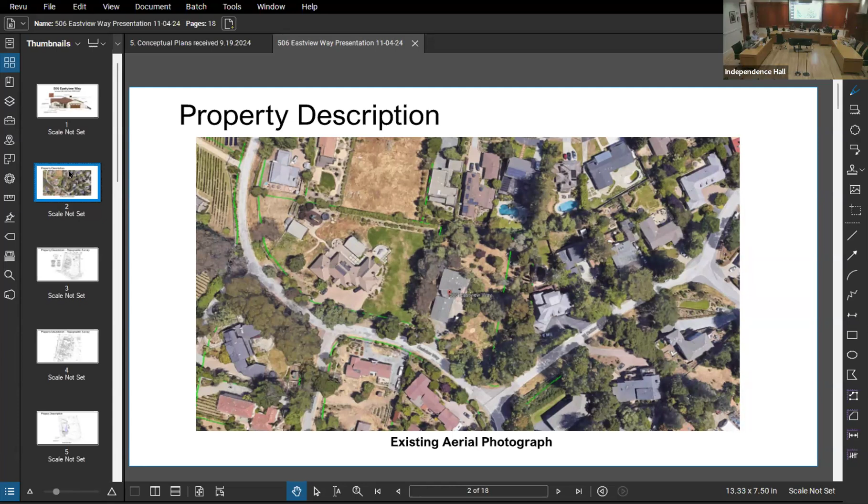To give you some background on the property description: the property size is approximately 1.15 acres over 2 parcels, both owned by the homeowner. It's about 50,000 square feet and is in the suburban residential SR zoning district. The residence borders the city of Redwood City on the right side, and the overall site gently slopes downward from an elevation of approximately 538 feet on the southern side to 508 feet on the northern side.

The site also has a number of oak, eucalyptus, and acacia trees scattered throughout the property. The property features existing concrete cinder block walls in the northeastern section of the site; the current and future proposed uses for these are not detailed and will be described during formal design review. The property also includes a 10-foot-wide existing drainage and sewer easement running parallel to the north property line, and a 50-foot-wide PG&E utility easement adjacent to the southern property line that runs along the Eastview Way roadway.

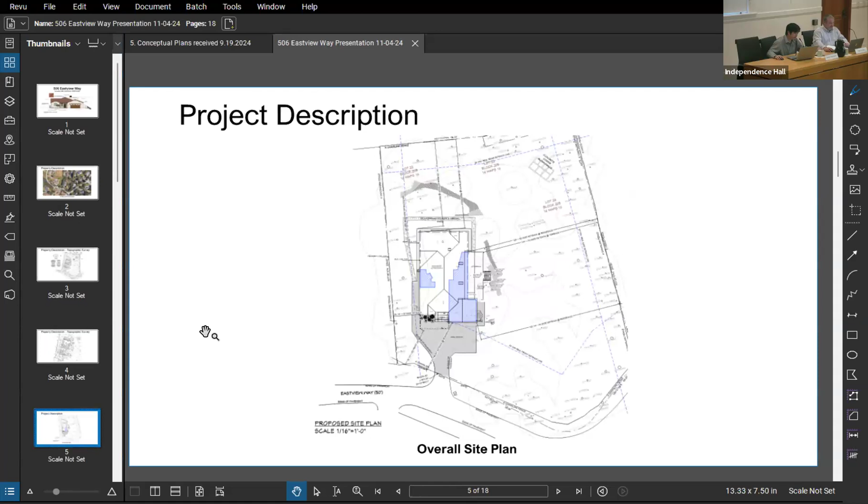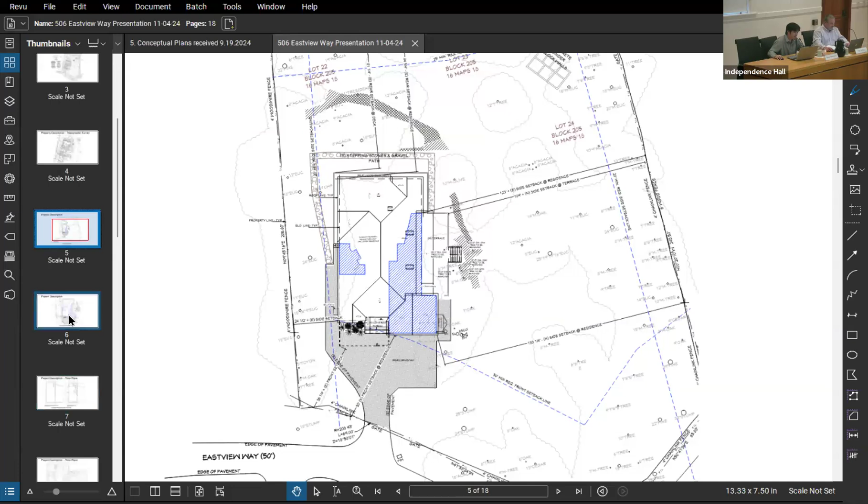This is the overall site plan enlarged to show the main residence, and what's outlined in blue indicates the portions to be added to the existing main residence.

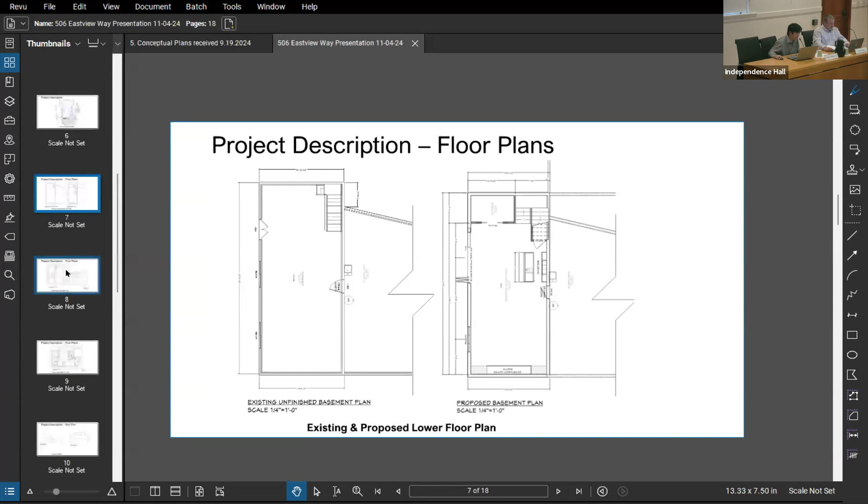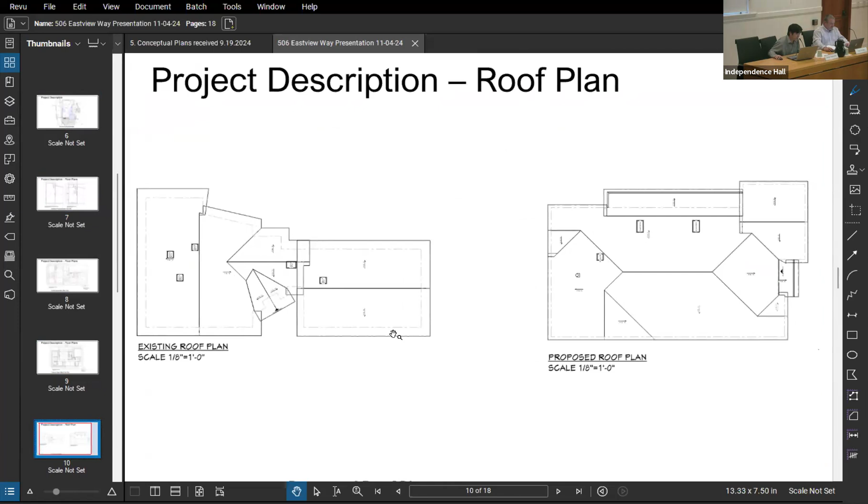You can see more of the extent of this extension with the existing roof plan, which has an irregular design with many cuts and corners. The proposed roof plan is more rectangular in design.

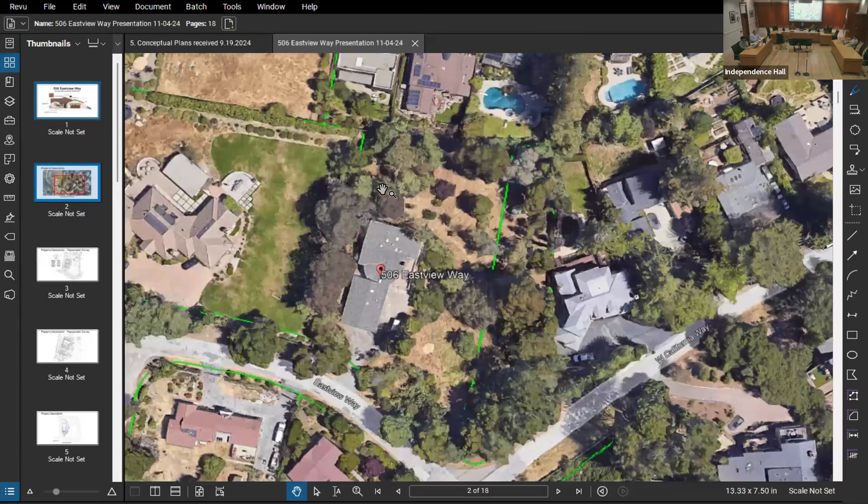Good afternoon. My name is Veronique Garcia, and I'm the applicant and designer of the project.

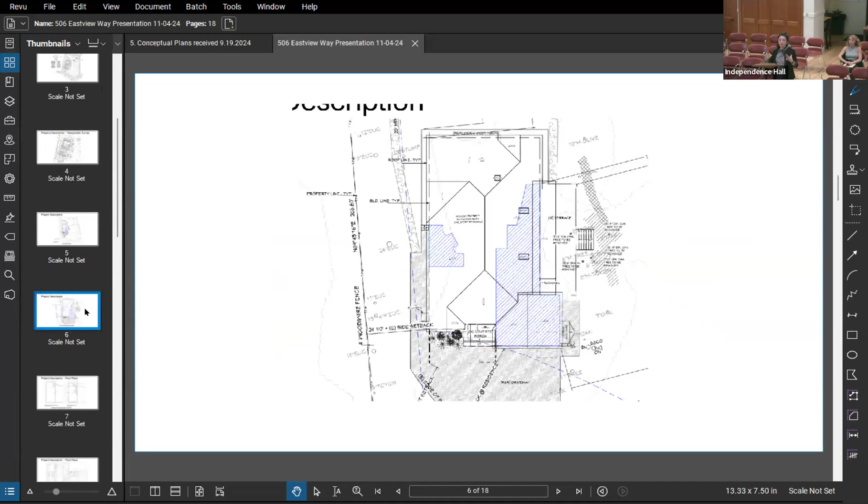To tell you a little more about how we arrived at the proposed design, one of the main goals of the owner was to convert the existing carport into a two-car garage. By doing that, we couldn't keep the existing setback of 36 feet. We had to change the setback to 50 feet, which forced us to relocate the garage, more of an extended project scope than we were anticipating. But in the meantime, it allowed us to add a front porch and have the main entrance as a feature when you come upon the property.

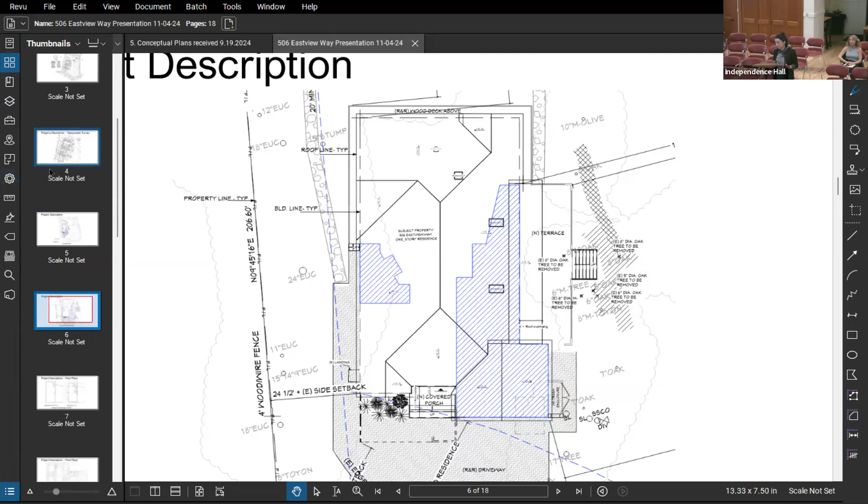Right now, the main entrance is on the left side, so when you arrive at the property, you arrive into the carport. By doing the relocation and addition, we really tried to minimize the impact on the existing terrain as well as the grading. I hope you like the design, and if you have any more questions for me or for the owner, Angela Pietro, she's present here as well.

Thank you. Does anyone on the board have questions?

I just have one question. It sounds like the neighbors were notified of the project, but did you do any neighborhood outreach? Did you talk to the neighbors, show them the plans, get their feedback?

I talked to a few of the neighbors and they were all in support of the project and said that they would write letters or show up. So I haven't heard any opposition so far.

I just have one question. Are all the fences on the property existing? No, the fence is new. The old fence was not secure and I had to keep my dog in, so I put in a new fence. They told me I did not need a permit for that, so I'm hoping that's okay.

Technically, a permit is required, but we can wrap that into this process. Okay. Anything else? You received bad information.

Actually, a question for you, Kiego. With regard to the 17-foot height restriction, I noticed that the top, the high point of the ridge, is currently measured at 17.7 feet.

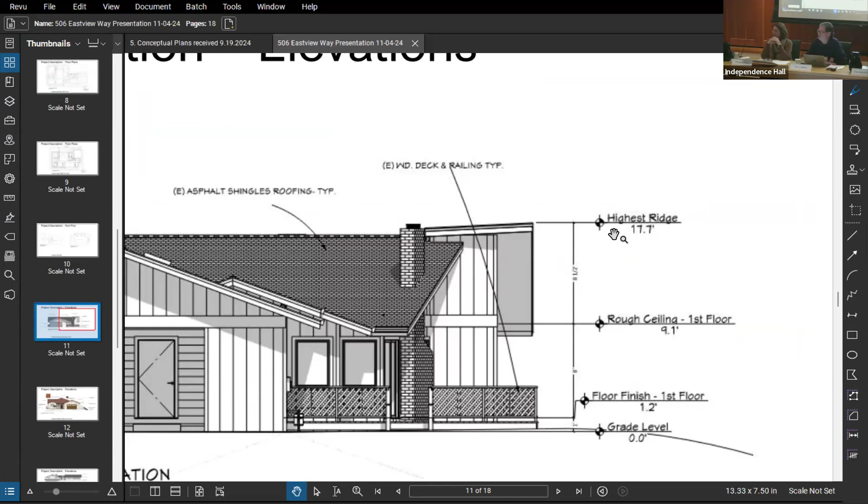That would just get noted informally and you would seek an adjustment on that? Because it's the main residence, they can have a taller building, but the only thing we would need to double check is if it affects the setback in any way. Usually if it's just that much taller, the way the roof line goes, it's probably going to be set back far enough to meet the height limit, but we can look at that closer. All right, thanks.

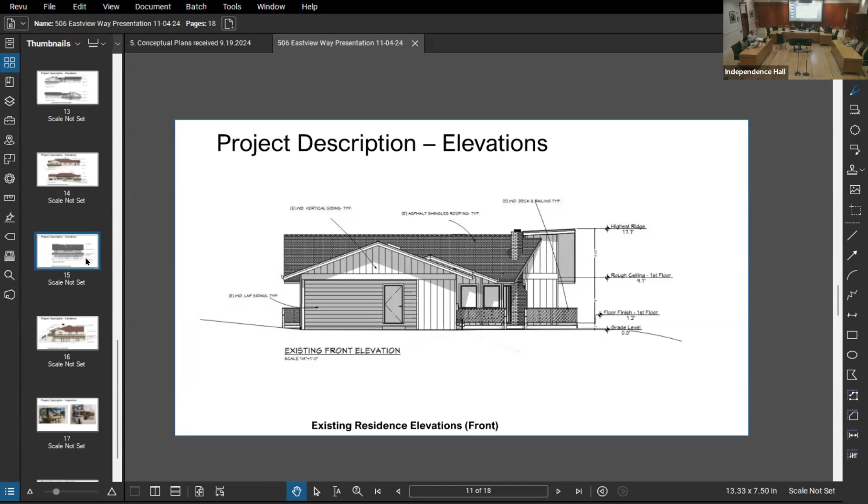Okay, good, no other questions from me. Any others? Oh, actually, no, I take that back. I want to make a comment on the stucco.

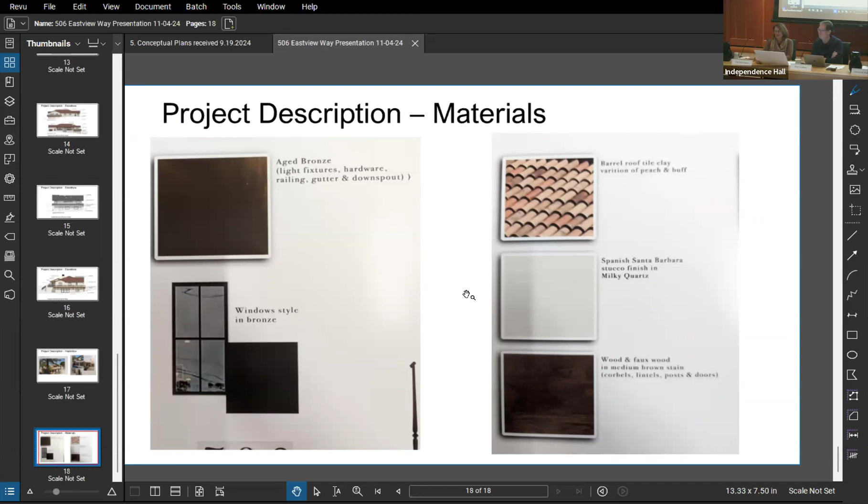We generally give guidance to avoid very bright white. We tend to look for something that's a little off-white. I don't know without a real sample of what milky quartz looks like exactly, so it's hard to gauge, but it would definitely be a soft Spanish cream tone. It won't be bright white. Just want to avoid a stark white stucco.

With regard to that, sorry, I wanted to add something. All the materials will also now meet the wildland urban interface requirements, meaning the stucco will be all fire rated, which is a big improvement since the house is currently all made of wood. I forgot to mention that, thank you.

No other comments from me on materials. Anyone else? No, I actually think I like the materials. Normally we go for wanting a more muted tone on the color of the house, but it's not on a scenic corridor or anything, so if it's not bright white, that's great.

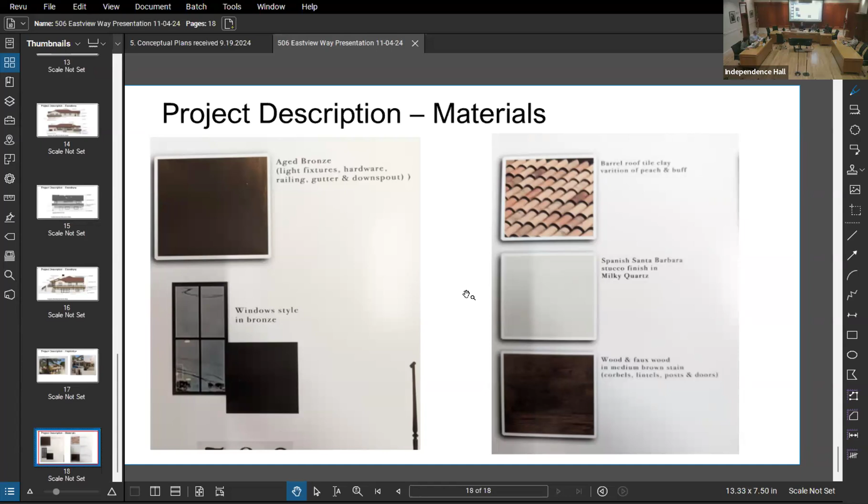The other thing is I like what you've done changing the entryway. I always like a nice curb appeal, and right now you really don't have curb appeal, so I think doing that is quite beneficial.

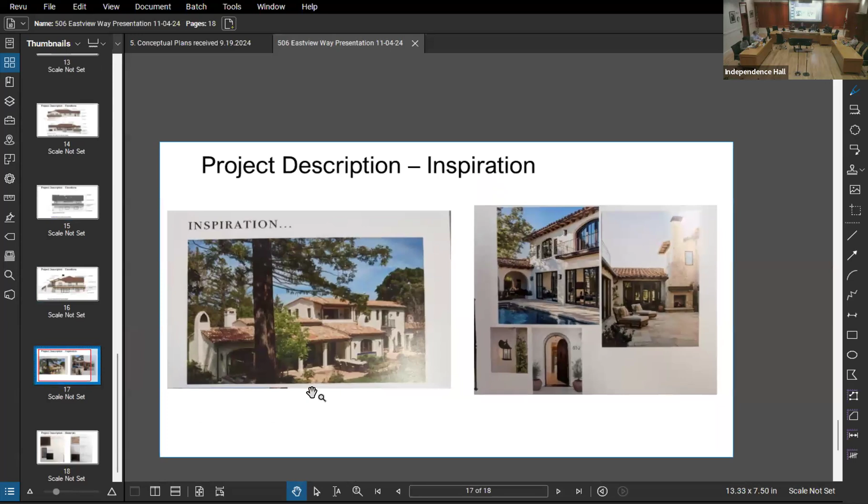I think the colors look true to the Spanish style you're trying to create here, and I think you've done a nice job putting together the organic finishes with the bronze and the barrel tile roof. I think it's really attractive. We haven't seen something Spanish style for a long time, and it's very nice.

Anything else? I guess the one question I had, have you thought about how solar might fit on the site in the future, considering the Spanish style tile roof, how we want to put it on the roof? I haven't recovered from my last solar project, but fair enough.

We'll consider it. There will be certain requirements to meet minimum standards for the building code, especially if you're doing a new roof. It's easier at that time with a tile roof, you can integrate it better into it as opposed to breaking up existing tile. So if that's the case, they would work that into their building construction plans. Otherwise, they could look at something that is ground mounted. It is a requirement.

I don't know all the specifics of building code requirements, but definitely for new buildings—this one isn't maybe quite going to be a new building, but there may be certain requirements and they'll have to follow those if necessary.

I don't know how you attach them to the tile. Attach it before, you build around it. The building across the street did it after the fact, but they did do it.

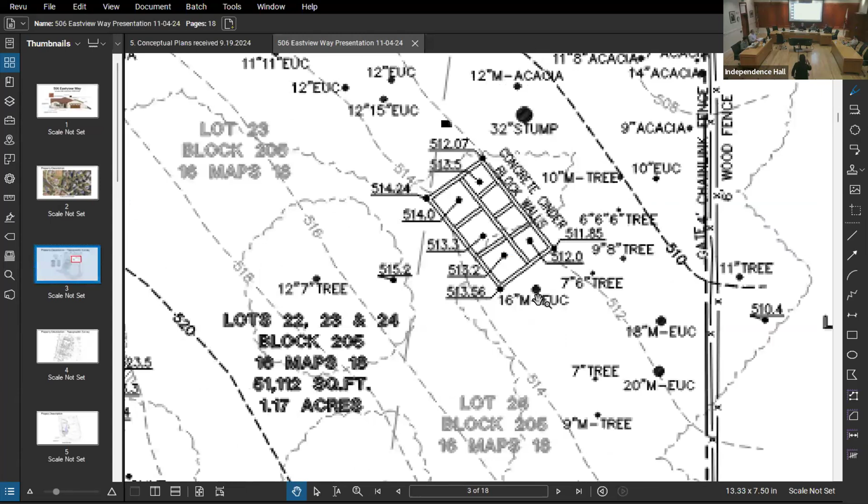They were just there when Angela bought the house, and the idea is maybe in the future when she can do the landscaping, how we can reuse them in the landscaping, hopefully. So if not using the remodel, they just get rid of them, or maybe they can be used inside the remodel, who knows. I just haven't hauled them up the hill yet, they're heavy.

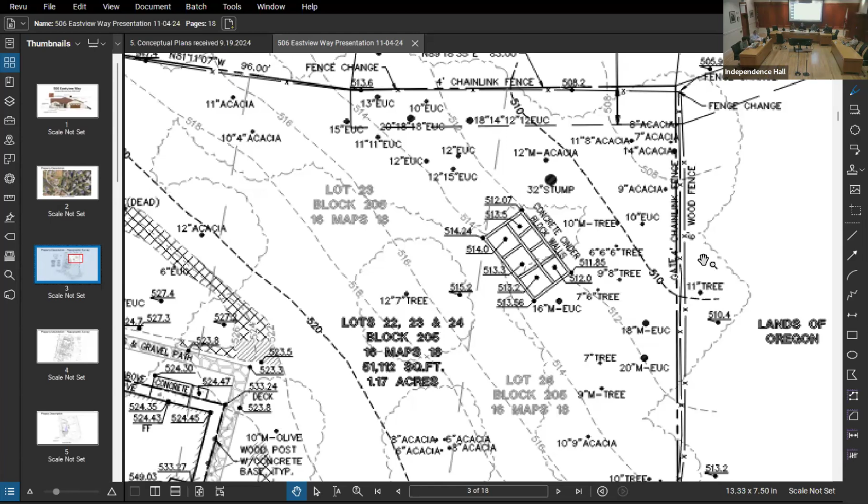Another question for staff, is it a requirement as part of this that the two parcels be merged? It's possible, that's something we're going to look at closer at the formal design review stage. I'll do a deeper dive into the title report. They may need to formally merge the properties. It's not a significant issue, it's more of a technical exercise they'll have to do with a legal description stamped by a surveyor, and then we can get that recorded. But it's something at the formal review level we will be looking at closer.

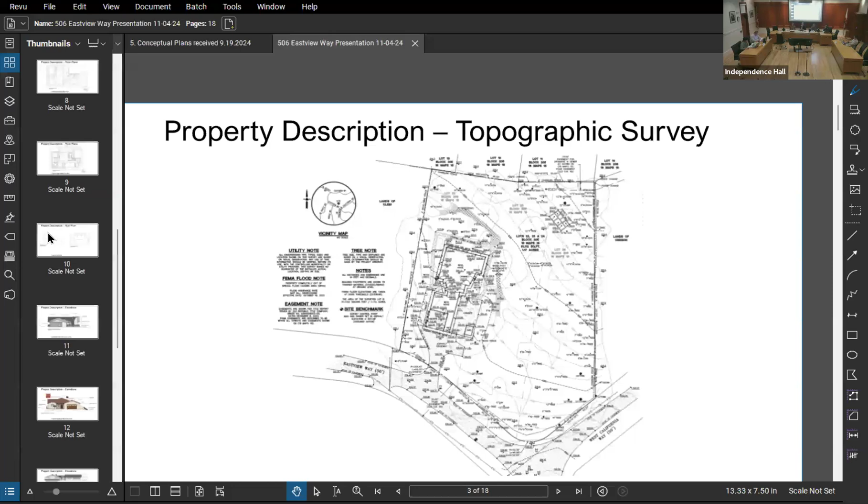Any more questions or comments? I just, you haven't gotten to the point of landscaping for formal review, or fencing or gates. I would just request that you keep within the guidelines of the town for the type of fencing and gates that we approve. Just be aware of what the town's guidelines are according to that fencing and gates.

Anything else? Okay. Does anyone on the board feel strongly that they wish to see this project come back for formal? It was awesome.

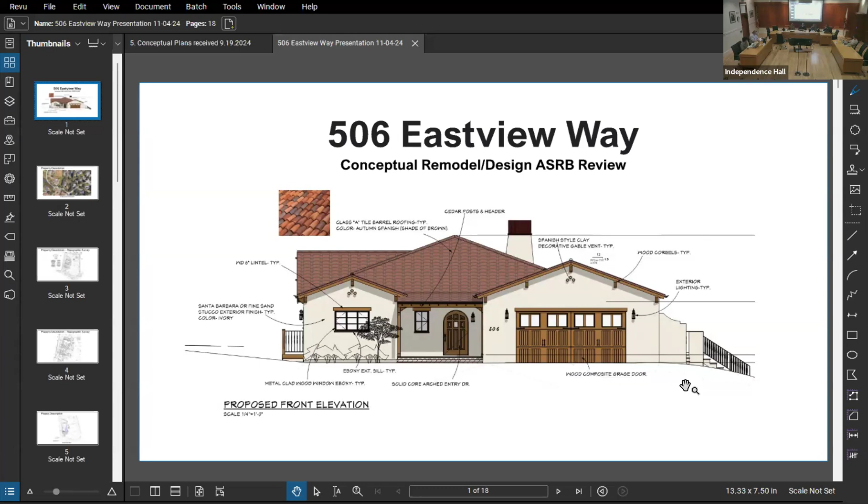Yeah, it seems like it's in the neighborhood and outside of being brand new. Okay, I think you have the makings of the motion, most of what you've just said.

So the story poles have not been installed, and there's a couple options. One is, as you noted, they could come back to ASRB for formal design review, at which time story poles would be required. On the other hand, we've seen this in the past with other projects at conceptual level that do not have significant concerns about the project, and what we can do, also just for an explanation to the applicant, is that we can continue this conceptual design review.

You can install story poles, bring it back to the ASRB on the consent agenda, meaning they don't have to look at it unless people have new comments based on viewing the story poles. At that time, if the ASRB so directs tonight, staff could complete the formal design review. So it's just a matter of getting your story poles installed, putting you back on an agenda. If there's no comments, it just gets passed that evening.

Otherwise, the other option is you don't put story poles up at the conceptual level, and then you have to come back to ASRB for formal design review, as opposed to just doing it with staff. So we can work with you and talk to you more about that option, and how that works out.

So if the ASRB is so inclined, they could continue this item with the allowance for the applicant to install story poles, with the intent of coming back on the consent agenda to forward the project to staff for formal design review.